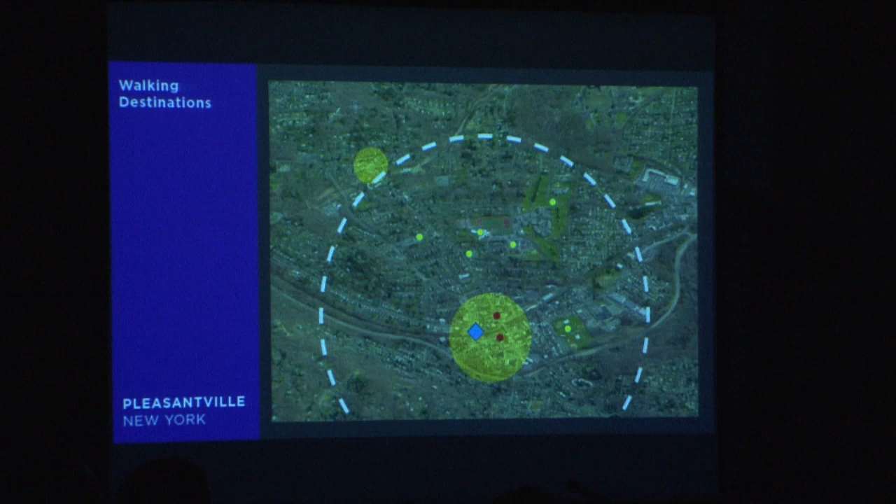Great housing, a 9-hole country club, lakes, ponds, Westchester's best farm market, a downtown that has maintained some sense of place with relatively few vacancies, independent stores, now the New York U.S. headquarters for Henkel's and their demonstration kitchen, Pace University nearby, the entire life's work of Gordon Parks, famous photographer, right there on Wheeler Avenue, Burns Film Center, Media Arts Lab, incredible stuff. Add that to the fact that that ring shows a rough, easy walking radius to the yellow circle downtown and the blue dot, which is Memorial Plaza. All of these things have made this place called Pleasantville a place that all of us have been proud to live, and a place that has drawn lots of new people who are attracted to the same virtues that brought us here to begin with.

Thank you, Mayor. Again, my name is Jamie Maslin Larson. I am a landscape architect, and I'm really thrilled to be here. I'm probably the only one in the room that isn't from here, so that can provide a different point of view.

Just a tiny bit about Phil and I. We've known each other for a long time, we've worked together, and this is our first collaboration. This is great because we both come at public space projects from complementary points of view. I'm a designer and Phil is a planner. Phil is really good at sorting through priorities and ideas from the community, and then what I do is try to take those ideas and see how they can be translated into an actual design. We're both good in both areas, but we each have a little strength in one.

What Phil and I both believe passionately in is the design of the public realm. The public realm isn't a word we use in everyday language, but it's really the space between all the buildings where civic life happens. When it's designed well, you feel a sense of pleasure in being out in the streets. You might have more activity with people walking around, outdoor cafes, and people know where to go in town for a celebration. People flock to these public spaces because that's where there's a place to celebrate, or to debate and protest ideas. This happens in cities, not just at large scale, but it's really important to have high quality, legible, and accessible public spaces in communities of every size.

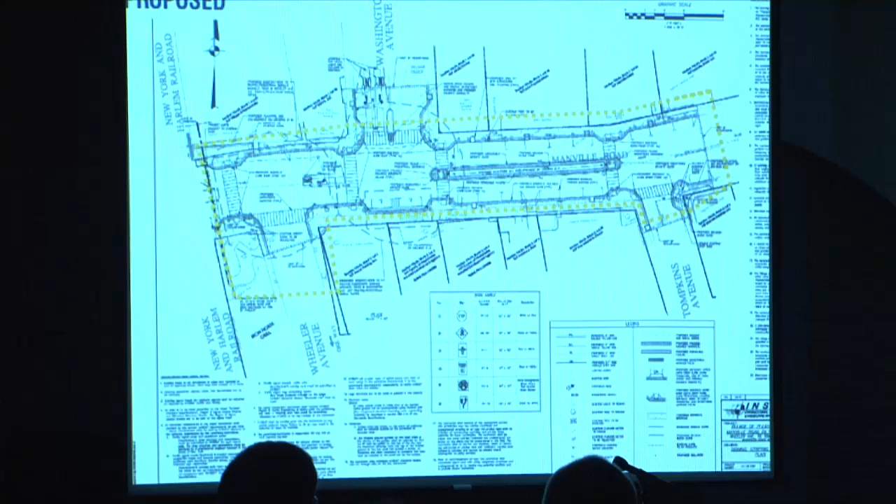Just to give you a little update, this is the plan view technical drawing of existing conditions prepared by our civil engineer. And this is an image of the streetscape improvements that will happen between Wheeler and Tompkins. You'll have bump-outs at the intersections, street trees, a planted median - it's going to feel much more friendly. You'll have safer crossings at every intersection, and other improvements like benches, trees, and lighting to make it more lovely to be in.

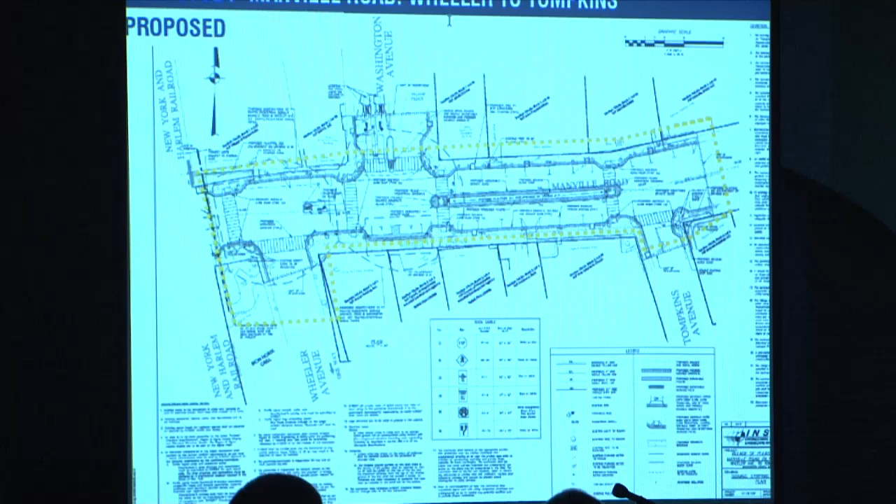This is the existing condition of the area from Memorial Plaza to Wheeler.

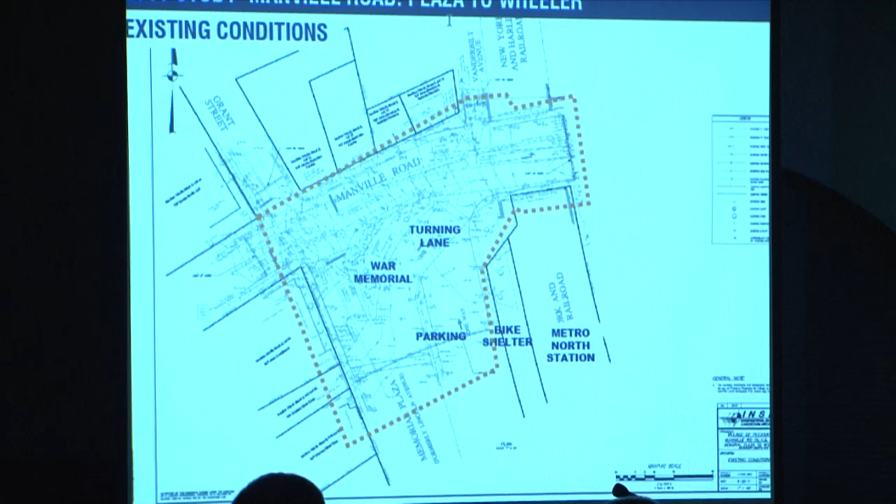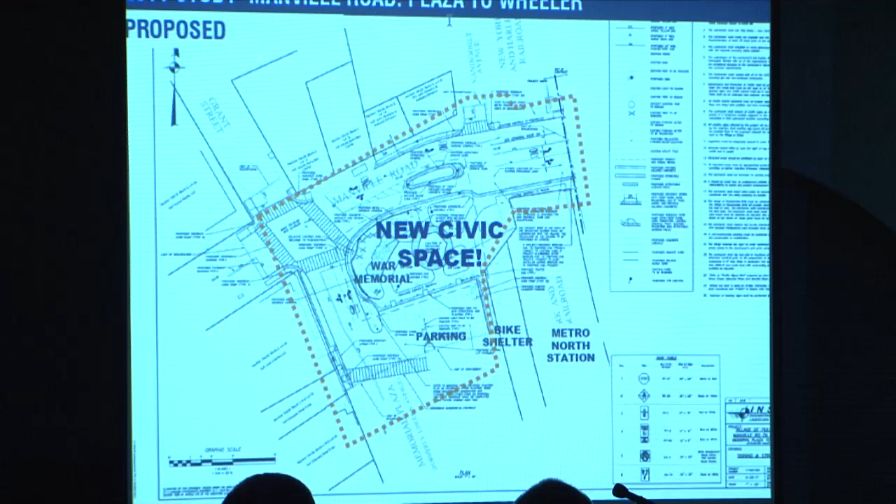Basically it's a vast black hole of vehicle-dominated spaces. But what showed up as an opportunity was to remove the turning lane and really consolidate and create an open place in the middle of this traffic-oriented area so that it becomes a new civic space.

When I first was introduced to Pleasantville, a community member mentioned this idea that Pleasantville is this. I was asking, what's the really special qualities of Pleasantville? What makes Pleasantville completely different?

It was described to me as a 21st century village. I immediately thought of, as the mayor mentioned, I worked for a Dutch company for 8 years, and I used to travel to Europe quite frequently. It really had this vibe that is really of a lovely scale and a lovely texture.

Actually, the core village is an easy 5 to 10 minute walk. Within that core is a really rich mix of public spaces, public uses like this, and the post office and Metro North, a ton of retail, restaurants, shopping, and of course the film center and other attractions that are coming up. This is really sort of in the core, in the heart of the village.

It's also at this crossroads. So this is what makes public spaces more meaningful, is that people naturally cross through and wind their way through the village, making a kind of natural destination that doesn't need a lot of, we don't need to plop a Ferris wheel here to make people come, right? It's really a part of the everyday experience of people walking through this community.

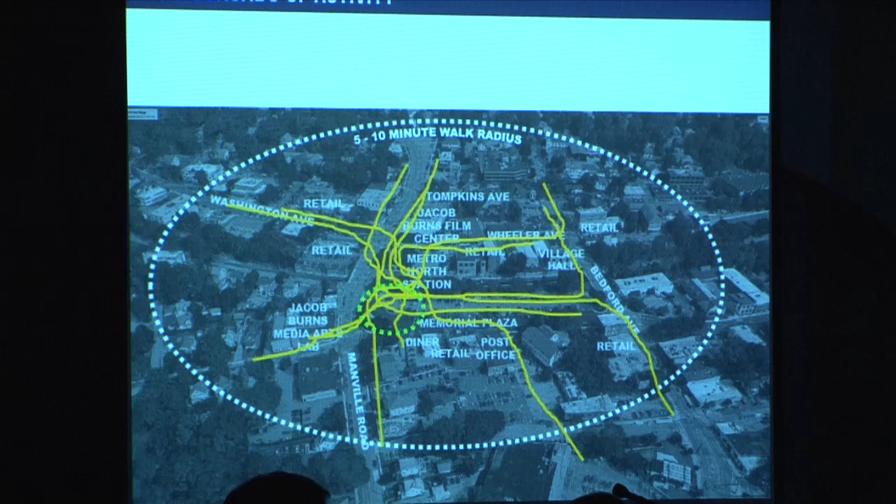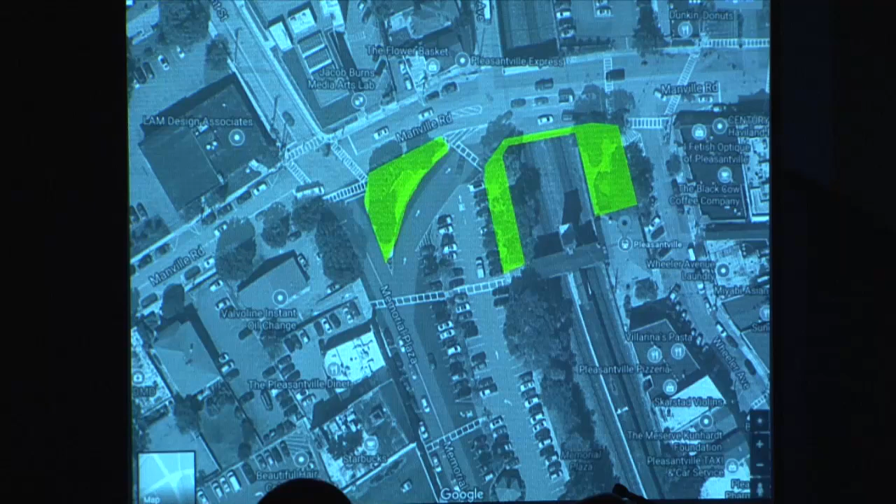This is an aerial view looking down on the site. And currently, as the mayor mentioned, there's these just chopped up places along the fringes that really don't create a kind of mental map. You just see them as fringe, and it's not really a landscape, and it's really not a place that anybody would feel comfortable hanging out.

We think that there's lots of ways that this space could be integrated into the day-to-day life and bring in some very special moments throughout the year. And Phil will go into much more detail right now. Thanks, Jamie.

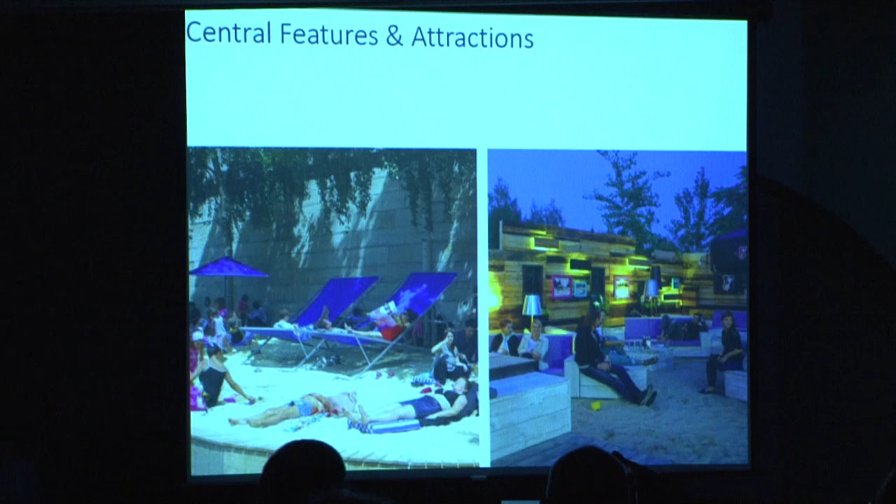Or in the summertime, maybe it's not outlandish to set up a small beach. I don't know. It's been done in other communities of different scales. It's an exciting opportunity to be sort of ahead of the curve, a little bit cutting edge image for the town, and a fun place to go. You can certainly imagine people saying, hey, I'll meet you at the beach.

That always sounds good. And then the next category that we want to think about is amenities. And I mean more than a park bench. I mean really much more than just the typical catalog seating, but something that really makes you feel comfortable and really is, evokes this response that we all have as humans when we see that comfy, cozy place.

A lot of it has to do with the design and the provision of the right amenities, whether it's really nicely designed seating with gardens and shade, even a fire pit. We'll have to check the local laws on that one, but don't hold back writing down ideas that are daring in tonight's meeting. Hammocks, swings, all kinds of fun stuff that we think really promotes Pleasantville, promotes the idea of it being unique and not just any old town.

And then finally, my last category is this: how do you manage it? How do you program it? Of course, we've got the world's greatest farmers market in this space already, and that's a great start. It's more than a great start.